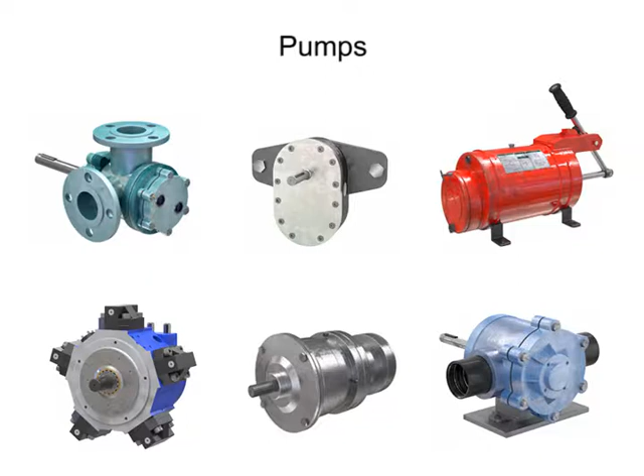Many different types of pumps exist to assist fluid movement in a variety of systems. An external gear pump uses two gears rotating against each other to provide fluid movement.

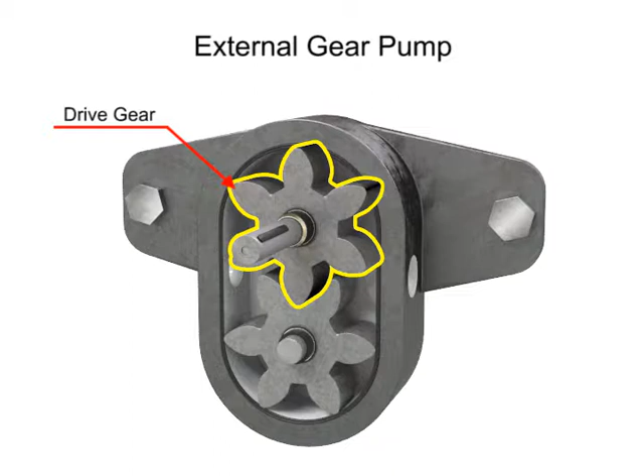One gear is driven by a motor connected to a shaft. This is called the drive gear because it is driven by a motor, and it in turn meshes with and drives the movement of the second gear.

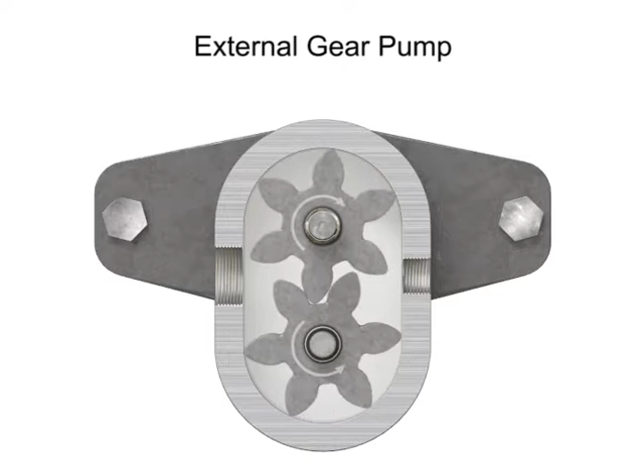As the gears rotate away from each other and come out of mesh, they create an expanding volume on the inlet side of the pump. This creates a vacuum at the inlet port, allowing fluid to flow into the pump. Then fluid flows into the cavities and is trapped by the gear teeth.

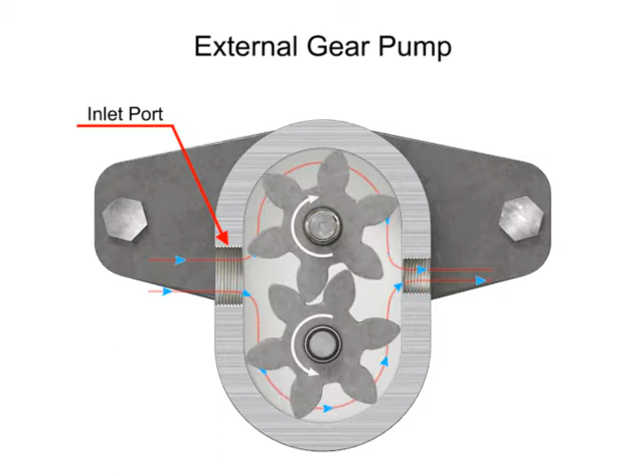As the gears rotate, a flow path is created around the outside of each one. Fluid trapped in the slots between teeth is carried around and discharged into the cavity with the outlet port. Meshing of the teeth in the center of the pump seals the outlet port from the inlet port. No fluid passes between the gears.

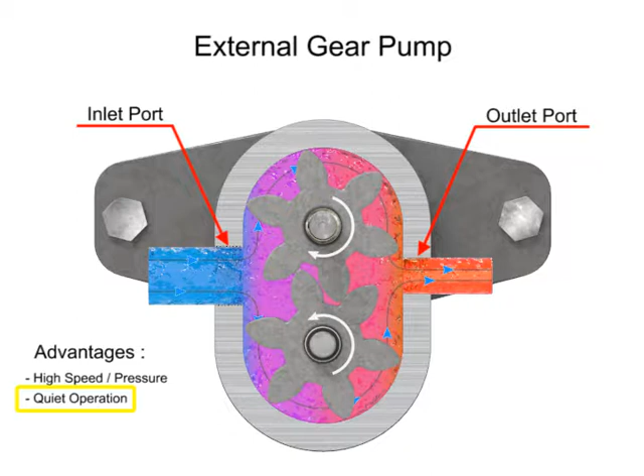The advantages of external gear pumps are their high speed and pressure, relatively quiet operation, and that their design accommodates a wide variety of materials. Disadvantages include bushings in the liquid area can become worn and that they have fixed end clearances.

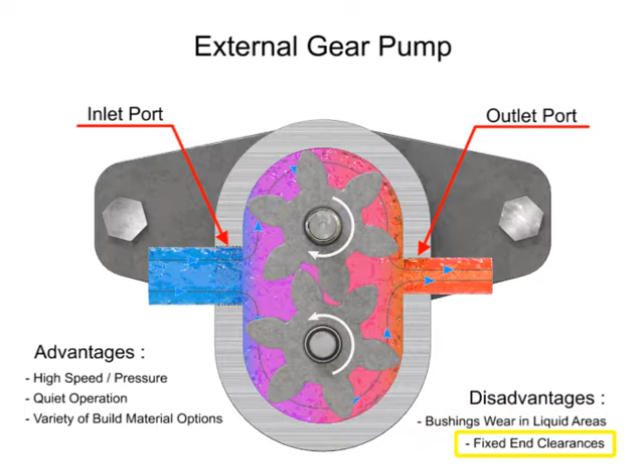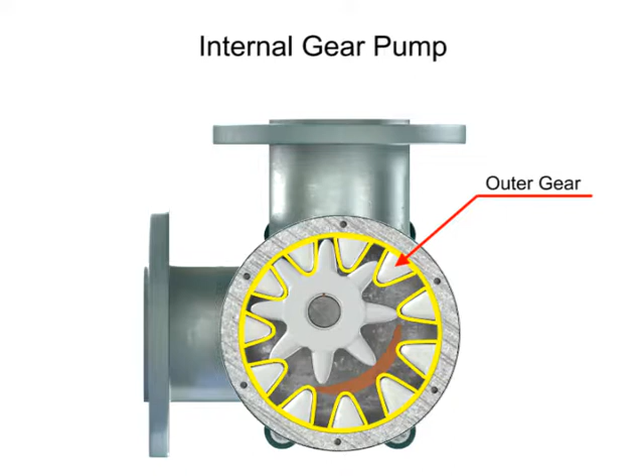Internal gear pumps are exceptionally versatile. This type of pump has one inner gear which is inside a second outer gear. The inner gear has a shaft driven by a motor and has teeth that protrude outward. The outer gear has teeth that protrude inward toward the center of the pump.

As the inner gear rotates, it meshes with and moves the outer gear. Liquid is trapped in the gear spaces and carried from the inlet to the discharge. A stationary crescent-shaped divider separates the intake and discharge portions of the fluid.

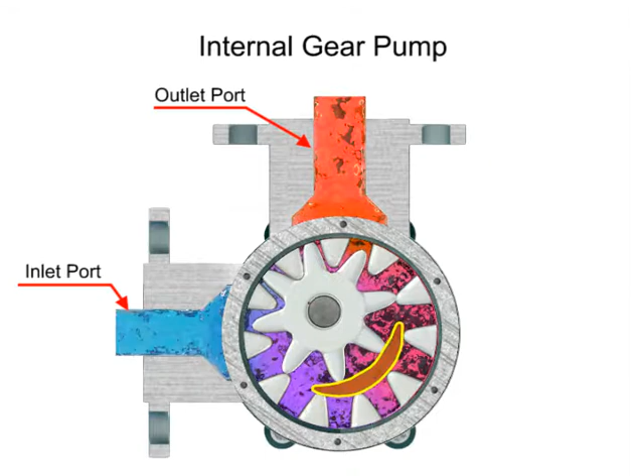Advantages of internal gear pumps are a smooth and almost pulseless flow, and slightly more horsepower for its size. Disadvantages are its higher cost, limited size range, low to moderate pressure ratings, and few sources of manufacture.

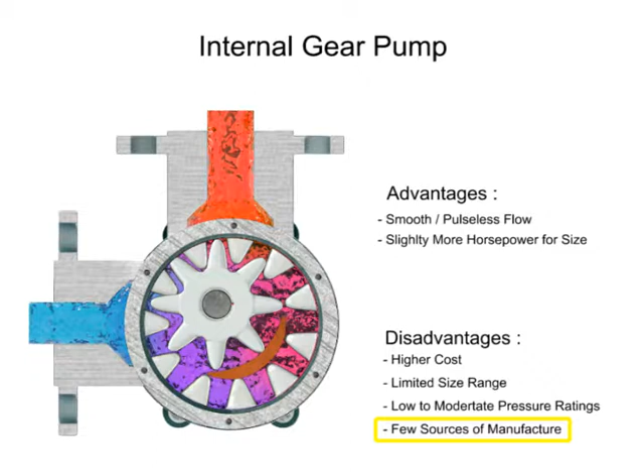A rotary vane pump is a positive displacement pump that consists of vanes mounted to a rotor. The vanes are on an off-center drive shaft. As the shaft rotates, the variable length vanes slide in and out to maintain contact with the pump housing. The tension in the vanes is maintained by either springs or hydraulic pressure. As the vanes rotate, they create chambers of varying sizes within the pump.

Fluid enters at the largest chamber. As the vanes rotate and retract, the chambers get smaller, forcing fluid to exit through the discharge port.

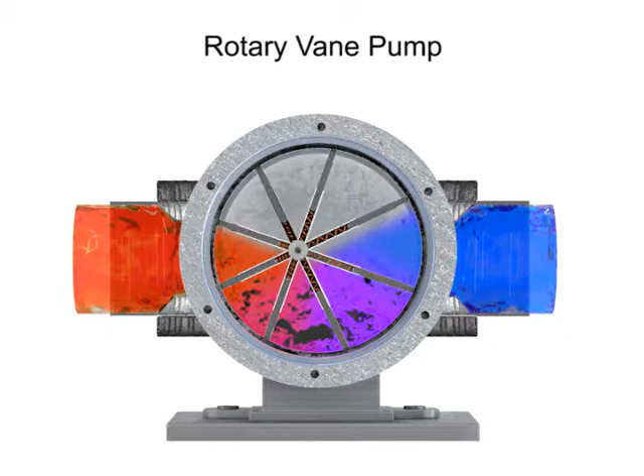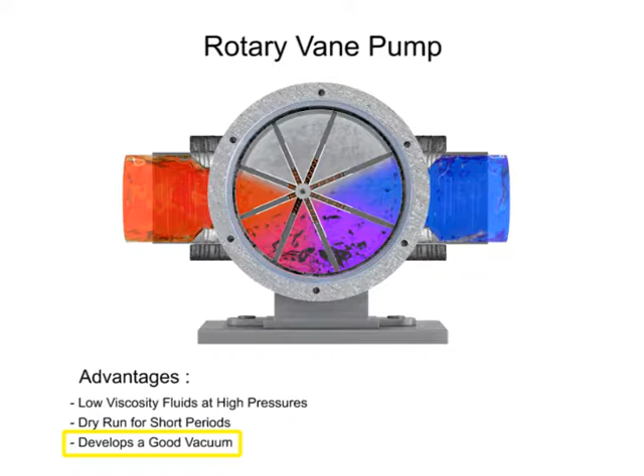The advantages of vane pumps are that they can handle low viscosity fluids at relatively higher pressures, can dry run for short periods, and develop a good vacuum. Their disadvantages include complexity and their unsuitability for both high pressure and high viscosity fluids.

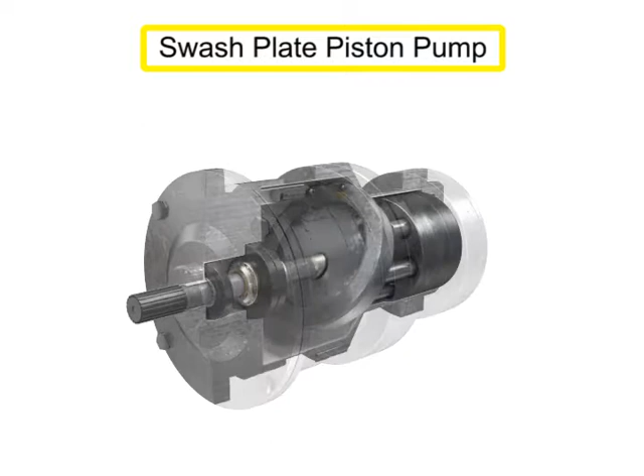Piston pumps come in many different forms. A swash plate is a device used to translate the motion of a rotating shaft into the reciprocating motion of a piston.

Swash plate piston pumps have a rotating shaft connected to a cylinder block containing pistons, which are pressed against a stationary swash plate that sits at an angle to the cylinder. As the shaft rotates, the pistons move against the swash plate, causing them to reciprocate within the piston block.

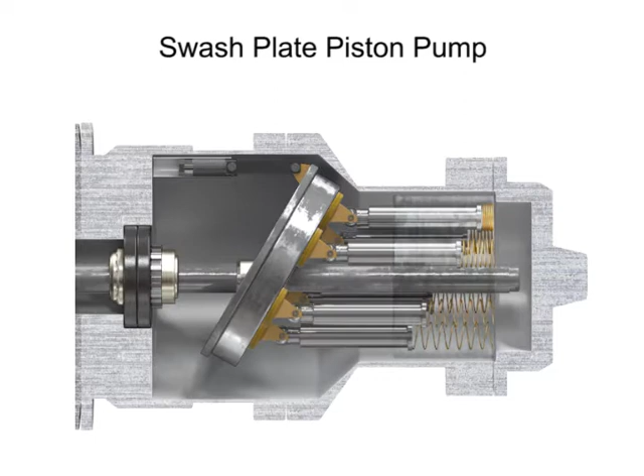The pistons create a vacuum that forces fluid in during half a revolution and expels fluid during the other half. On the intake stroke, a spring ensures the pistons pull back and maintain contact with the swash plate, causing fluid to fill the empty cavity left behind.

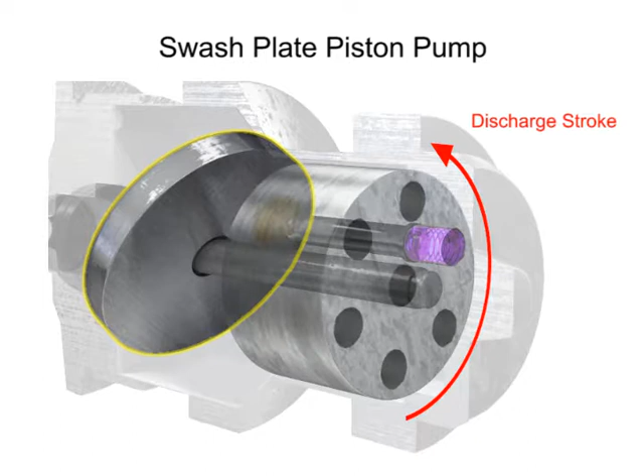On the discharge stroke, the angle of the swash plate forces the pistons back inside the piston block and discharges the fluid. The greater the slant on the swash plate, the further the pump pistons move and the more fluid they transfer.

Piston pumps, in general, are manufactured with closer internal fits than other pumps. This means that internal slippage can be less so that they operate with reasonable efficiency at pressures both too high or too low for the operation of other pumps.

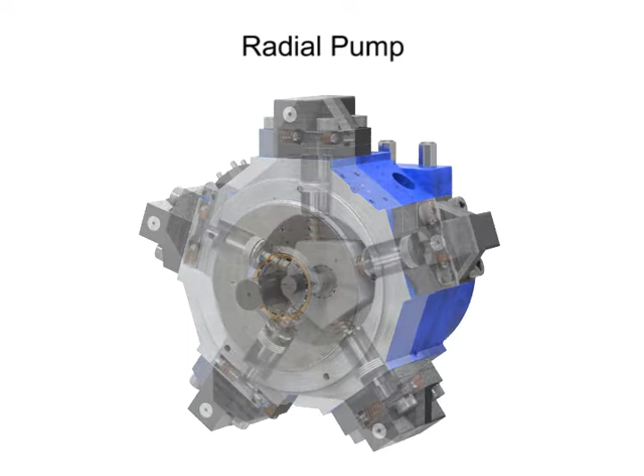Radial pumps are designed so the pistons stroke in a direction at right angles to the shaft. The pistons are arranged like wheel spokes around a cylinder block with an eccentric central cam mounted on a drive shaft.

As the shaft rotates, the cam moves towards the pistons, forcing them down into the cylinder block and discharging the fluid. As the cam moves away, springs help retract the piston and cause the intake stroke. Check valves ensure that fluid only enters the inlet ports and only exits the outlet ports.

Radial piston pumps have a low noise level, very high loads at low speeds, and high efficiency.

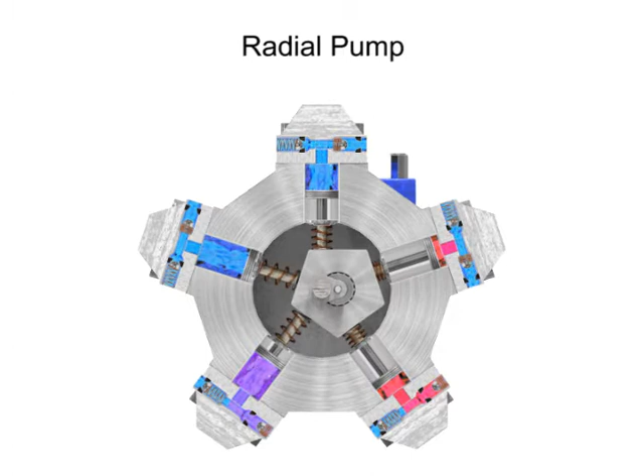Hand pumps are used when a source of power is not available or where the extra expense of a power pump isn't warranted. For example, they are used on shop presses and other portable equipment, serve as standby pumps, and serve as sources of emergency power.

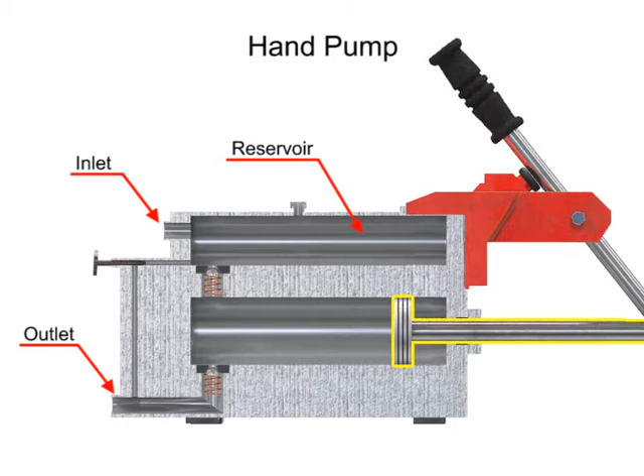Hand pumps are always of piston type and are usually constructed with a piston working between two check valves.

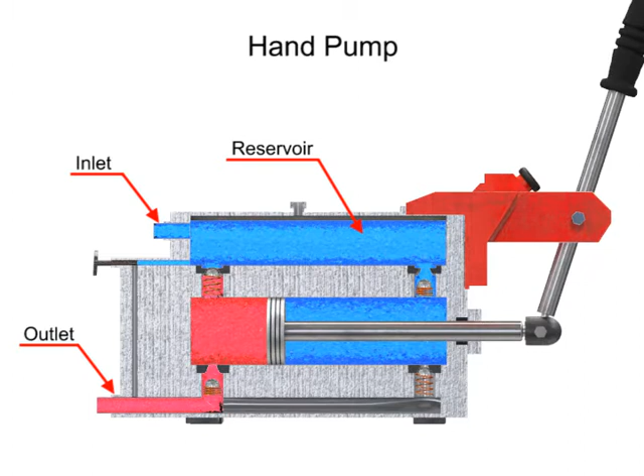Double-acting hand pumps are more efficient, allowing fluid to both enter and discharge on both strokes of the piston. Moving the pump handle in either direction allows fluid to be drawn in from the reservoir and discharged via the outlet ports. Check valves in all locations prevent fluid backflow.